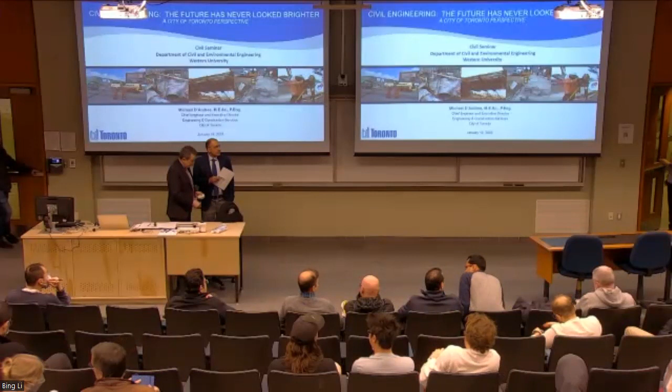Yeah, just easy, it's like...

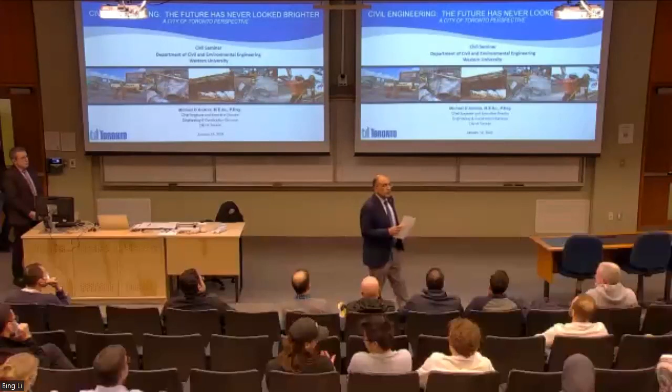Today we have a very special guest. It's a distinguished lecture, and that's why we open it for both our undergraduate and graduate students. As you can see, the title is very inspiring. I really like it. So the title you can see on the screen: Civil Engineering, the future has never looked brighter. City of London, City of Toronto perspective.

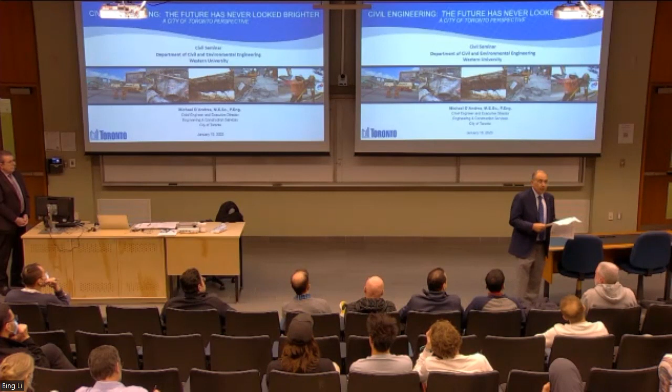It's my pleasure to introduce Michael D'Andrea. Michael is the Chief Engineer and Executive Director of Engineering and Construction Services for the City of Toronto. So he has big responsibilities, not only dealing with engineering, but also the policy and political side of managing engineering projects in the City of Toronto. You all know Toronto, it's the largest city in Canada for sure. Michael, in his current role, leads about 650 professional and technical staff, responsible for the engineering design and construction of Toronto's water, wastewater, stormwater, transportation, and solid waste infrastructure, valued at about $1 billion annually. So, a very large portfolio, and he is leading some of the largest and most complex projects.

Michael is a friend of Western and the department. He kindly serves on the advisory group of the department, giving us excellent feedback about various matters. He is a graduate of Western, did his undergrad and master's degree from Western in civil engineering. He was recently recognized by a very prestigious award for his lifetime achievements, the 2021 Ontario Professional Engineers Award, Engineering Medal for Management. We have something in common between myself and Michael: we both have a very good friend, Professor Badur, who was Michael's supervisor, and one of my great mentors when I started my career. So, Michael, thank you very much for joining us today, and we are looking forward to hearing your presentation, which will be very interesting.

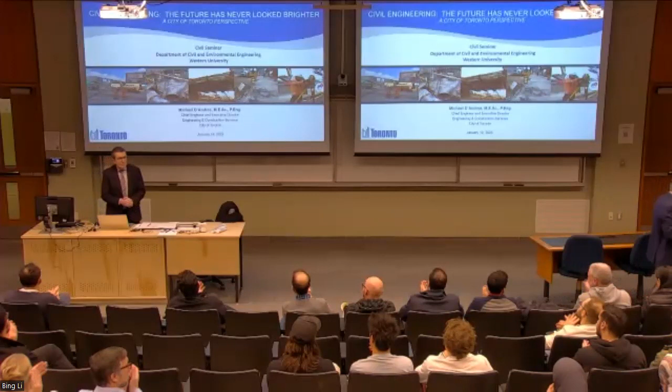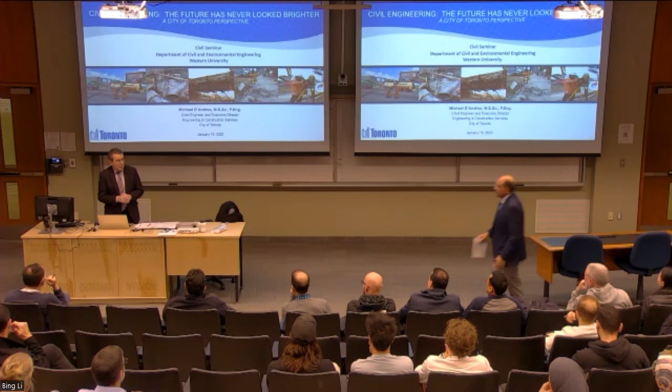Thank you very much for those kind remarks. Can you hear me at the back? I prefer not to use the microphone, a little more natural for me, so thank you. And thank you kindly, Dr. El Damatty, for the invitation. It is a bit of a homecoming for me, having spent a good number of years here at Western, and I'm always delighted to come back.

The title speaks volumes, and it is reality, it's not make-believe. My hope is that as I go through my presentation, I'll give you glimpses into the world of civil engineering in a municipal context. You'll see, certainly when I was in your shoes, sitting in those chairs, not exactly knowing what the world of civil engineering would hold for me when I graduated, that the world is your oyster. I'm envious of those of you graduating this year, but those of you in the program will see that the world of civil engineering, particularly in a municipal context, is like no other time in history, in my opinion.

So with that, I'm going to rush through the presentation. There's an awful lot of material that I think you'll be interested in.

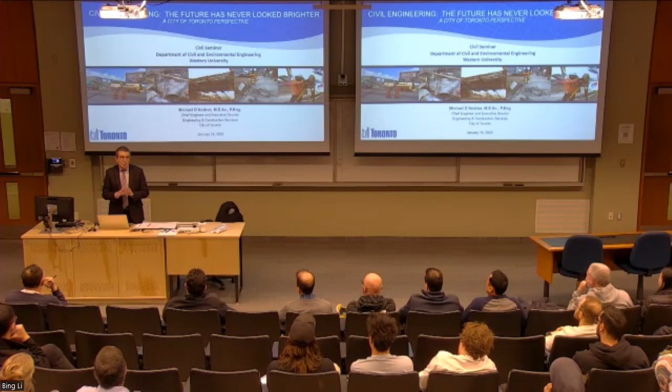How many of you are from the City of Toronto or the Toronto area? Just so I get a sense, because I go through some of these slides and I've got streets named. Okay, so not that many.

City of Toronto, as Dr. El Damatty said, is the biggest city in Canada, and very populous, with very dense urban development, particularly in the downtown core.

It's important to look at the context of what we're managing in terms of infrastructure. Often forgotten is the water infrastructure. It's underground, or we've got sewage and water plants that are out of sight, out of mind, but hugely important in servicing the life in a municipality.

Then we've got the transportation infrastructure. You see that and its state visually, but it's also a huge source of concern for us in making sure it's maintained to be safe and operable at all times.

I want to highlight, without getting into a lot of detail, that there are 900 bridges. I know a few of you specialize in structures - it's a huge body of work for us. We're obligated by provincial regulation to inspect these bridges on a 2-year cycle, and what we identify from that is embedded in a capital program, because from a due diligence standpoint we need to make sure those bridges, our most critical infrastructure from a civil standpoint, are properly maintained.

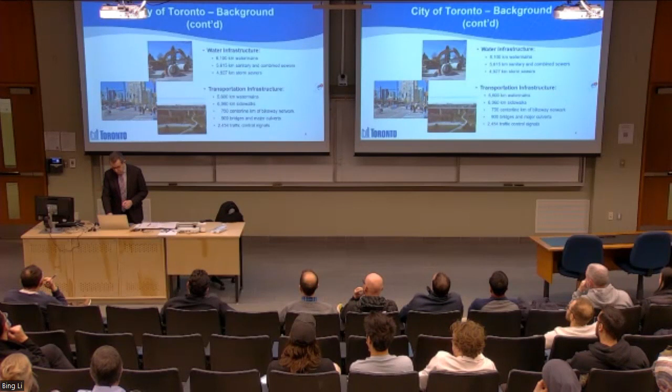I want to give you a bit of context on the City of Toronto, just to set the stage for the rest of the presentation.

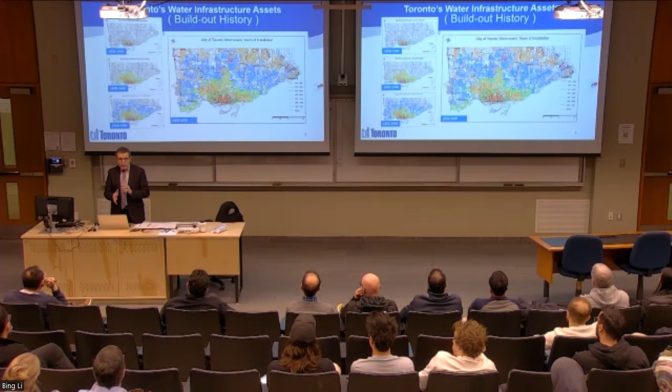What I've done here is shown the build-out of infrastructure. It's shown as water, but it could be anything - roads, sewers - just to give you a sense of the growth of the city. Take-home message: the downtown core has the oldest infrastructure, and it happens to be an area of particular focus for a number of different reasons.

This downtown area, shaded in pink, is where we've got combined sewers - a single sewer servicing both sewage and stormwater runoff. This is a huge problem from an environmental standpoint in terms of water quality impacts to our rivers and the waterfront, particularly when it rains, and a huge body of work that we're dealing with.

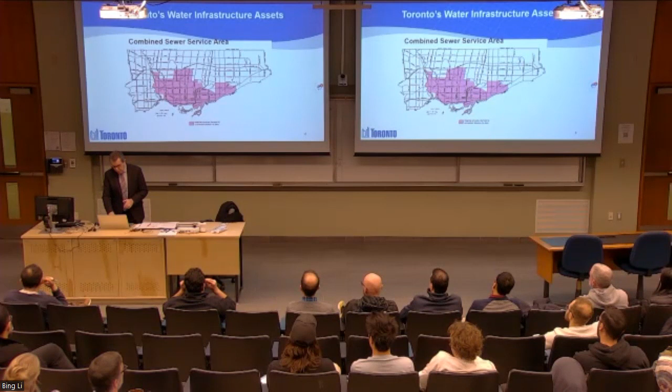This segues into this: Toronto has been identified as one of 43 polluted areas of concern in the Great Lakes Basin. There's been a huge level of effort - we've got a multi-year plan to deal with pollution problems largely associated with our sewer discharges. That's been another passion of mine, and pretty much my entire career, one way or another, has been spent dealing with some aspect of that.

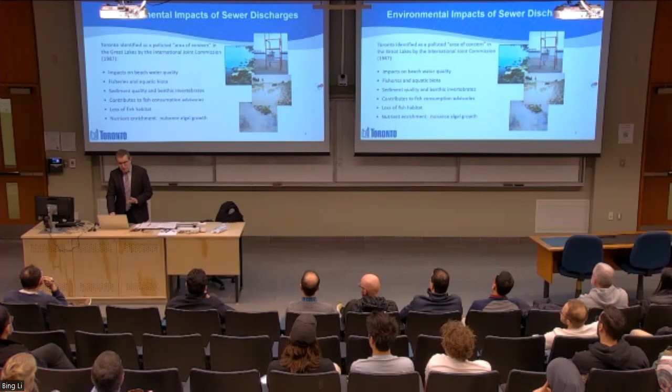Then we need to deal with extreme storms. Climate change is here and it's real. What we're seeing is far more frequent, intense storms that result in urban flooding, both surface ponding and sewer backups and basement flooding, but also huge impacts on infrastructure - we've had washouts of bridges, as shown in that picture, and situations where we have turbidity plumes from rivers that flow to Lake Ontario.

Lake Ontario happens to be a source of drinking water for the City of Toronto, and these issues cause concern in terms of being able to operate our water treatment facilities under these extreme storm conditions. Okay, so here we go - civil engineering rules.

Toronto's population will grow by 700,000 in less than 30 years. It's a huge challenge for us because that old downtown infrastructure wasn't designed to support the kind of growth we're seeing, and you'll see a couple more slides showing how significant that is. It's incumbent upon us to think ahead and plan for the future, working with our colleagues in planning to map out where they're forecasting future growth so we've got the necessary infrastructure to support it.

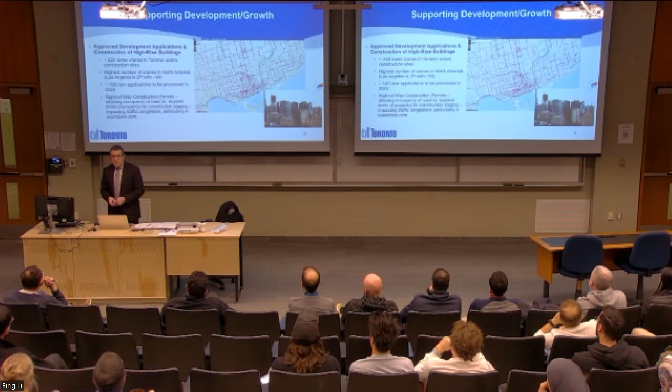So development growth - this is reality now. Each one of those specks on the map, I apologize for the resolution, represents a development either queued up waiting for approval, with approvals often going through my shop, where engineers look at the ability to actually service that development, particularly high-rise condominiums, making sure we've got the infrastructure to service it. In many cases those dots represent active construction sites.

These are staggering numbers for a guy who's been in the industry his entire career. We have 230 tower cranes in place in the city of Toronto, not just downtown but across the city. My colleague in transportation, who issues permits for lane occupancy for construction staging, sees about 100 applications queued up to the end of the year. We are the highest number of tower cranes in all of North America currently - the second highest is Los Angeles with only 50. So you can get a sense of the kind of growth Toronto is seeing today and forecast for the coming years.

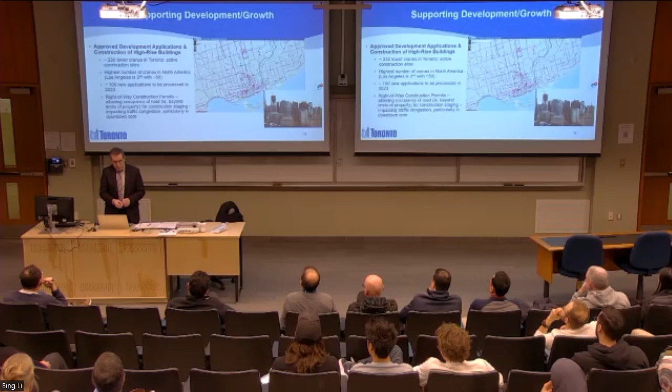On the geotech side, what I haven't shown here is that we were working collaboratively with the Oak Ridges Moraine Group, which is the conservation authority. Their geotechnical staff mapped out a three-dimensional profile of the surficial geology and groundwater regime across the city of Toronto, extending right up to the Oak Ridges Moraine. It was critically important to have a first cut on what the groundwater regime is in a particular location.

If you can imagine deep foundations, several floors of parking below grade - if your foundation ties into an aquifer, there are huge pressures with respect to relieving that hydrostatic pressure on the building. Normally we would have allowed direct discharge to our sewer system, but we can't now - we just don't have the capacity. This forces geostructural engineers to design the shoring system, sometimes with cutoff walls, essentially creating a bathtub in which the building is situated. It's a huge body of work. We've led the development of a strategy to deal with this, looking at new technologies in both design and construction - a huge body of work that's pretty recent.

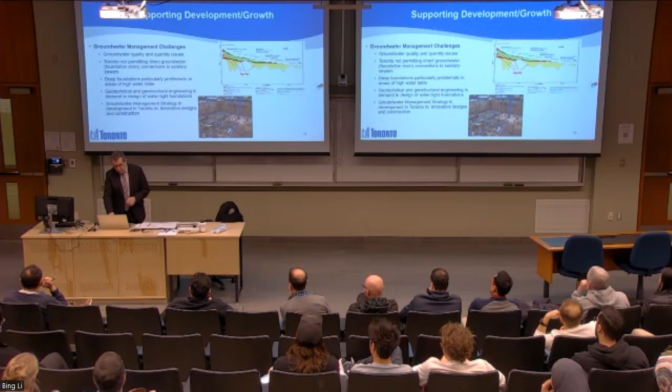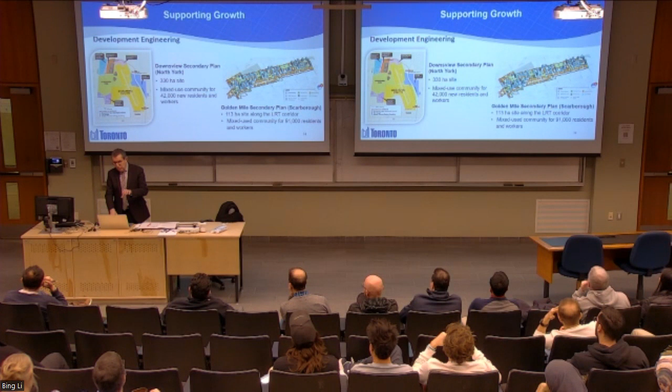These are a couple of large tracts of land in Toronto that are being developed. As I said, Toronto is completely built up, so what's happening now is intensification within these city boundaries. Those are two applications - one is north central and the other is in eastern Toronto.

So a take-home message: we've got a series of tunnels as well as local sewers and storage tanks to provide for that additional growth, and then reduce the overflows into the Humber River, which is one of the major watercourses in the city of Toronto.

So again, these are staggering numbers, even for me. The total project cost to be constructed between 2025 and 2032 is in the order of about $700 million. It's a major project. We're currently in the design phase. We went through an environmental assessment process to evaluate options, and we're currently into detailed design for that solution.

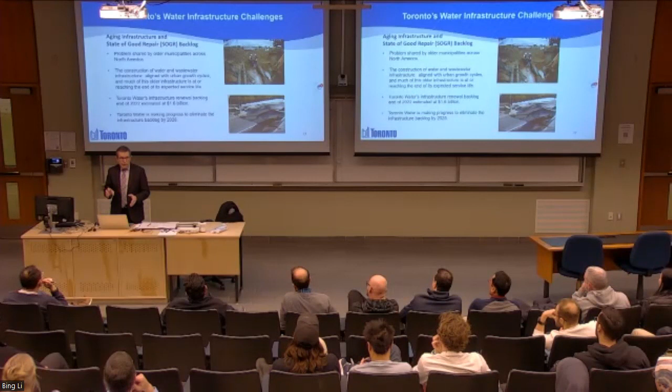And so the staggering numbers in terms of what the backlog is as it stands today. Some of these numbers are fresh off the press. I mentioned Dr. El Damadi. We are in the middle of a budget review process for 2023, which council is now hotly debating, and a lot of these numbers are extracted from that. Again, this is real life in the city of Toronto context.

This gives you a sense, thinking back in time, of how we built up the city, going back to those earlier slides. This water main data is representative of the situation we deal with across all of the infrastructure. We have 9% of those water mains that are 80 to 100 years old, well beyond their theoretical level of service life, and 15% over 100 years old.

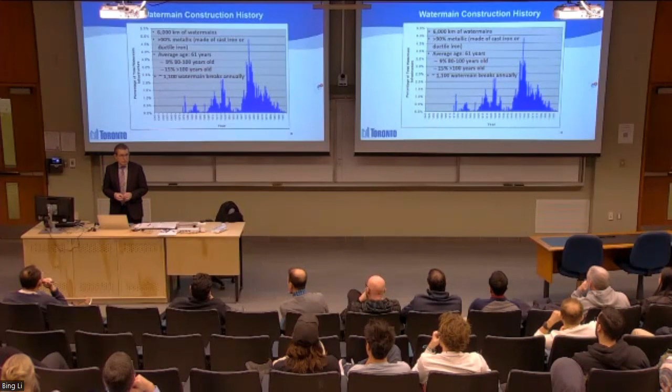We have water mains that were built post-WW2 in the northern, suburban areas of the city, that were spun cast water mains in very corrosive clay soils. They need to come out of the ground. It's been one of the challenges getting to those water mains before they fail and cause major disruption. So there's a huge program to deal with water main replacement.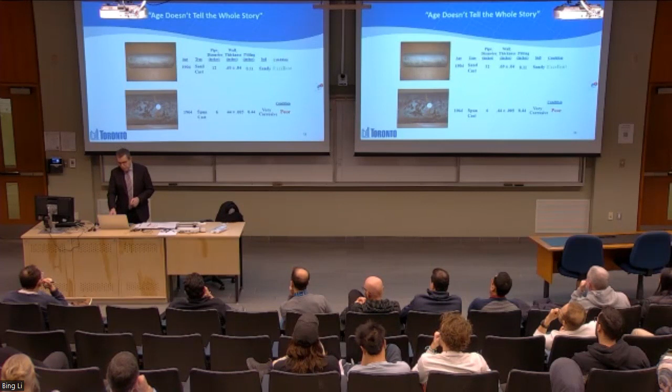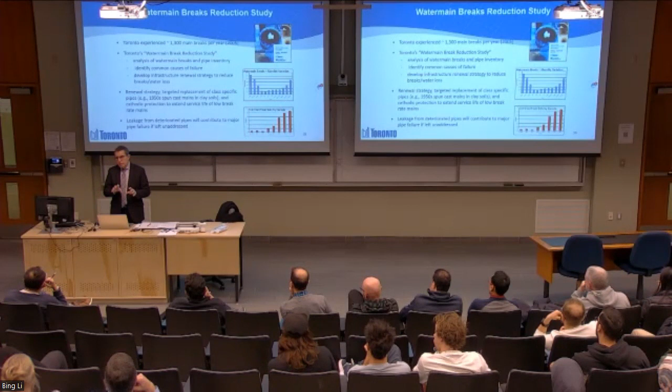So this is some of the analysis that we had done. Back in the day, we had something in the order of 1,300 to 1,500 water main breaks a year. The slide with the blue bars shows the seasonality of the water main breaks. We get most of them in the wintertime when you have frost penetration, causing movement to the water mains, making them fragile, so they break. We're on the road to replacing and renewing that infrastructure in a targeted way. We're not replacing every water main just because it's old; we're targeting those at or close to the end of their service life as a priority.

This is something else that we did. We created mortality curves for each class of infrastructure, to try to anticipate when we might have to deal with the renewal of infrastructure in advance of actually running it to failure. Then you come up with a capital program that addresses the needs you've identified, identifying discrete elements of infrastructure that fit the criteria established, so you've got a way of addressing the need based on the limited funding available.

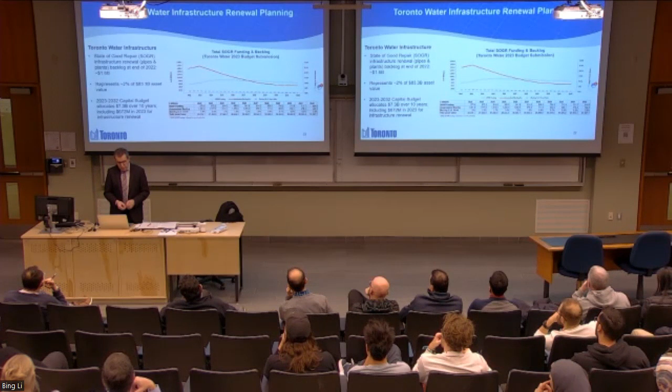So this is the good news in the Toronto Water context. The red line shows the infrastructure backlog in 2022, and it's slowly coming down, to the point that by 2032 they'll have pretty much chipped away at their entire infrastructure backlog. This is sewers, water mains, sewage plants, and water plants, all in. $7.3 billion of their capital program over the next 10 years, staggering numbers, is devoted to dealing with renewal of infrastructure, and almost $700 million is allocated for 2023. So that was just water, a big basket of assets.

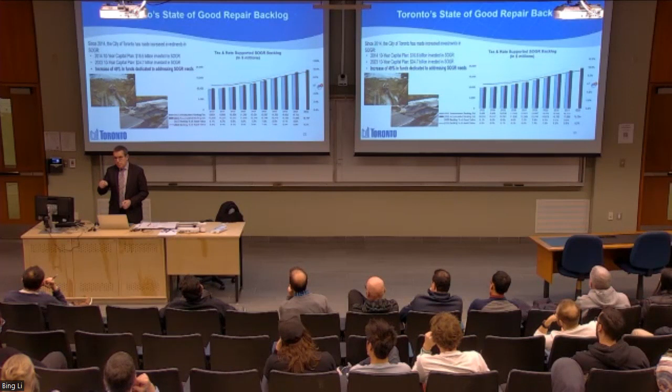This is now the city as a whole: water, transportation, building infrastructure. Again, staggering numbers, but this is hot off the press in terms of the 2023 budget submission. There's been an increase of 48% in funding directed towards state of good repair needs, i.e. infrastructure renewal. Again, these are numbers you couldn't have imagined, certainly at the start of my career, where there's been this concerted effort to invest in infrastructure in a manner you couldn't have imagined.

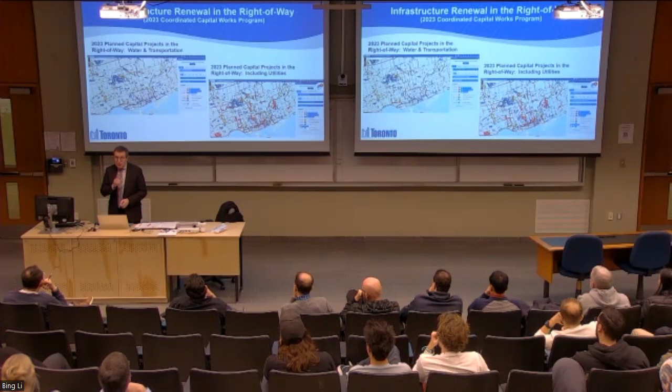Okay, so some real life big infrastructure projects. The Gardiner Expressway is a flashpoint. Dr. El-Damati will be front and center in front of council defending the need to invest significant dollars in the renewal of that expressway. $2.3 billion is our estimate in terms of what the rehabilitation needs. The elevated section, which is the source of much concern, debate and interest, is about 60 years old and at the end of its service life. It needs to be replaced. Our challenge is to actually get to replacing it in advance of it running to failure.

We run inspections - for the structural engineers in the crowd, we run inspections for the elevated section twice a year to make sure we've got things in order, and if we see the cover concrete is about to fall off, to get to it before it actually does, because it's a public safety issue.

So I'm going to show you the middle there, contract 1, Jarvis Street to Cherry Street. An innovative approach is what we used, successfully completed using accelerated bridge construction, which we're quite proud of. Our hope is that we use that approach for the remaining 4.5 kilometers of the elevated expressway.

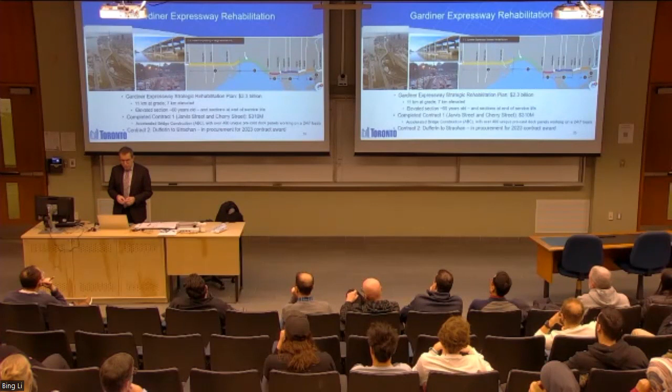So accelerated bridge construction, in a nutshell, to summarize: what we did for 1.1 kilometers was actually saw cut out sections of the elevated expressway - girder as well as the concrete deck - and the materials, both concrete and steel, were recycled. Separate and apart from that, we were prefabricating panels, some in the order of about 300 tons, 42 meters in length, 5 meters in width, and they were fabricated at a city-owned facility.

The contractor basically established a prefabrication shop on our land. The neat thing there was that we were able to quality control the production of these panels. There are about 410 discrete panels, each one different and precisely measured in respect to replacing what we had removed. So you'll see a picture on the bottom right.

That doesn't, it's not as basic as it appears, because each panel had a discrete number. It's kind of like a jigsaw puzzle. As a panel was removed, they had to organize themselves, stage the work in such a way that a panel that was removed could be replaced efficiently, as opposed to having to go into the yard and move panels around. So all of that pre-planning took a significant amount of effort.

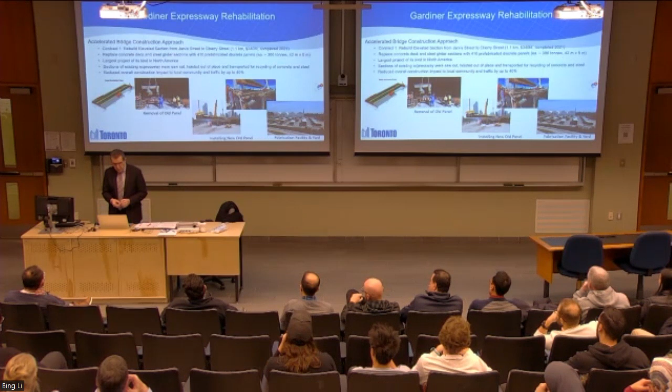The pictures in the middle show the hoisting operation, both in terms of the removal as well as the installation.

Now the neat thing here is that we pushed the envelope on this. We hadn't done anything like this before in the city of Toronto. In fact, in North America, to our knowledge, no one had done anything of this scale in an urban center. There's lots of accelerated bridge construction in terms of new construction in open fields, but not when you're in the downtown core of the city.

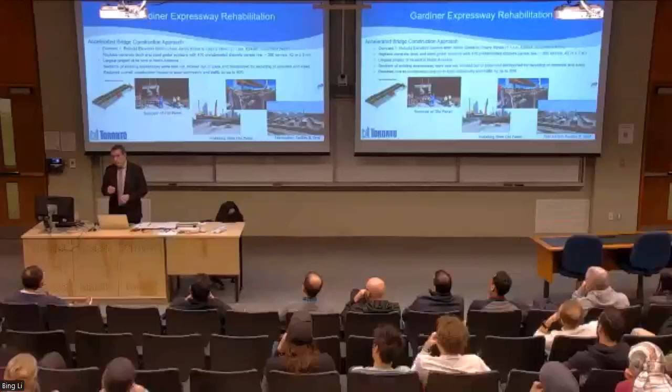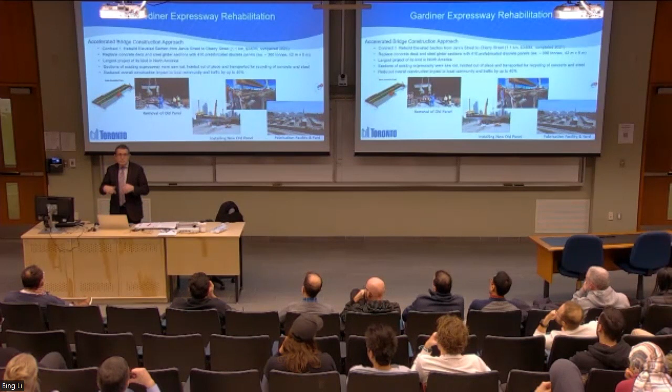For us, the advantage was, if you take up a lane of traffic on the Gardiner, there's a huge impact to the road users. But also, for this kind of construction, because it is noisy and dusty, there's a huge impact to the local residents. So what it did, we were able to shrink the construction schedule by about 40%, and ultimately reduce the overall impact to the local community.

Okay, transform the municipal right of way. So these are some major projects that are underway. Again, it's the rebuild of the city, but in a very progressive way.

6 Points Interchange is in the west end of the city, in the former city of Etobicoke. The picture on the left shows it basically looked like a highway interchange, a series of bridges and on and off ramps. It really didn't speak to intensifying, because it was really just having residential development right next to a highway. So the planners, working with the local community, came up with a completely wholesale revamp of the design, shown in the picture on the right, which is the finished road layout. I'll get into that in a little more detail.

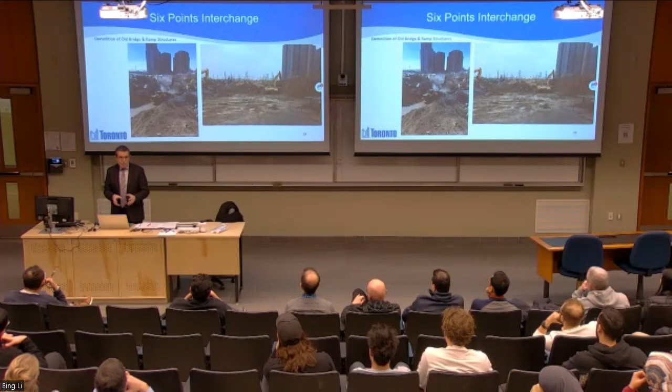Here's a picture of what went on during the demolition of those bridges and ramps. There was much media interest around that because nobody had seen anything of that scale. Basically, one entire section of the city was literally under construction at the same time, which meant major traffic impacts that we were dealing with.

So here's what the layout looks like, shown in schematic form. There's a cross-sectional view on the left, an artist rendering on the top right, and a bit of a cross-section on the bottom right. A couple of things I wanted to highlight.

It's a complete streets approach. This is in vogue now across the whole city, but internationally as well. You're looking at the municipal right-of-way, basically the road allowance, and you're maximizing its use for multimodal transportation—vehicles, cyclists, pedestrians.

At the same time, from a water quality standpoint, you have to drain all of the stormwater that falls on that streetscape. So what we've done very innovatively, shown schematically at the bottom, is a series of kind of like egg cartons. There's a number of vendors, but basically you're intercepting that stormwater and allowing it to infiltrate into the ground. What doesn't infiltrate, you end up picking up through perforated storm sewer pipes, and then they get discharged. You're trying to minimize the overall environmental impact of that road network to the extent that you can.

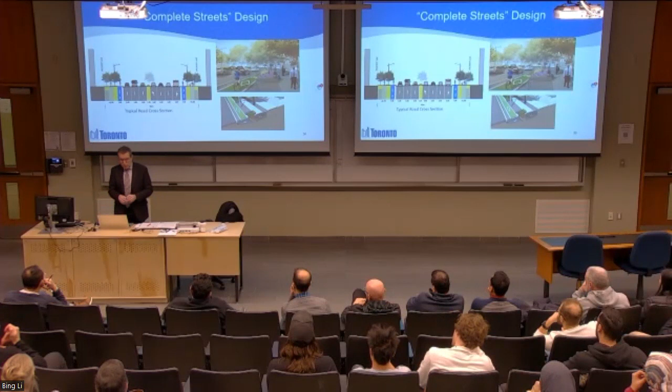And this is what it looks like. On the left, it's a picture post-construction. And on the right is that series of soil cells—those industrial size egg cartons that basically take the stormwater and infiltrate it.

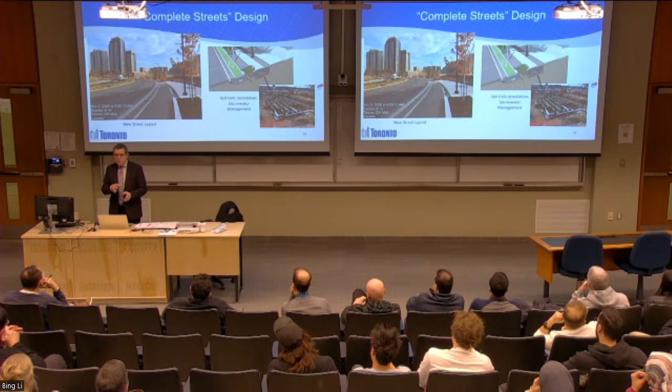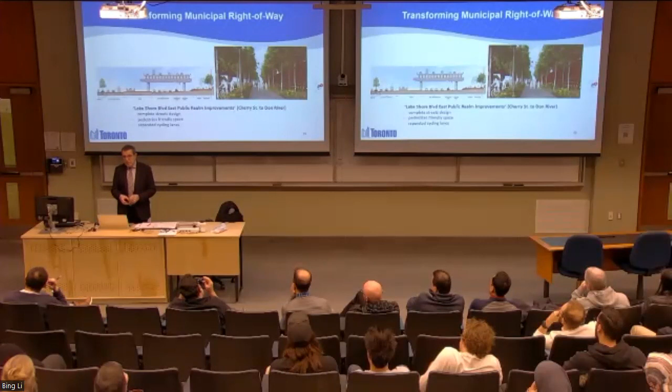Improving water quality - going back to my introductory slides, this is a huge body of work in Toronto. It's a real priority; we want to see ourselves delisted as a polluted area of concern in the Great Lakes Basin. There's been an awful lot of work. I'll start with this outfall project. Sad to say, but I started my engineering career on the pre-design for this outfall, and now, towards the end of my career at the City of Toronto, we're finally building it.

Long story short, there's a new outfall that extends 3.5 kilometers into the lake bed in rock into Lake Ontario, with a series of 50 diffusers over the last kilometer, sitting at the lake bed. All of the modeling for the design of this project was done with the approval of the Ministry of Environment and Climate Change, because we want to maximize the initial dilution so that outside of the mixing zone, we meet water quality objectives for a series of parameters. There was an awful lot of work on a proper design, with a limited amount of head available to drive the flows through that outfall.

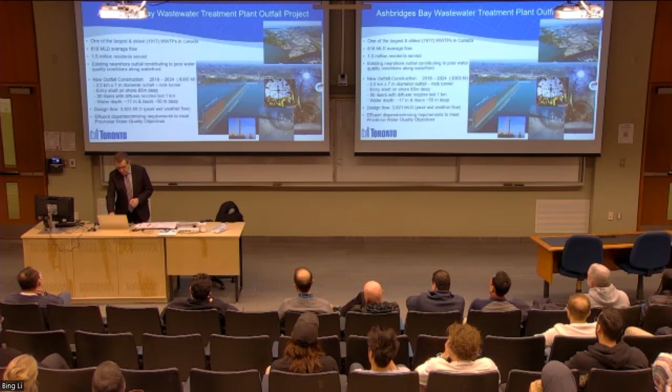Similarly, another project is now looking at the cleanup of the Don River. The Don River is one of the major water courses in Toronto, with the dubious distinction of being one of the most polluted rivers in all of Canada. It's been a real problem for us from a water quality standpoint. It flows into what's called the Inner Harbor - if anybody's been to Center Island, the water body between Center Island and the mainland is called the Inner Harbor. The Inner Harbor also sees the discharge of some of the biggest combined sewer overflows in the city, a huge problem from a water quality standpoint. Ultimately, to delist us as an area of concern, we needed to clean up the Don River and the Inner Harbor.

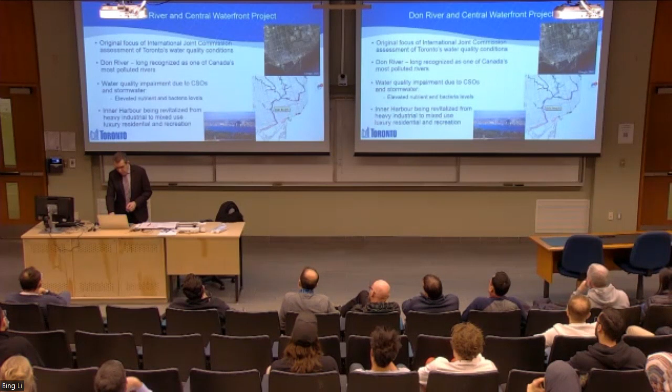Many, many years in engineering planning, many, many years on the engineering design. We came up with a series of deep tunnels, most of them in rock, but one in soft ground. The main stem, the Coxwell bypass tunnel, we just completed construction of. It runs 10.5 kilometers up the Don River Valley, down to depths of about 50 meters. What needs to happen now is the connection of the sewers that will flow into this tunnel so that they don't flow into the river.

We do provide for some overflows in the event that the tunnel is at capacity, but the design was premised on taking our historical rainfall records and doing computer simulation modeling to assess how big the storage needed to be to support our end objectives. The pink tunnel comes down and connects up at our Ashbridges Bay Treatment Plant, which is where that outfall project is. The next leg is the Inner Harbour West Tunnel, currently in detailed design. Ultimately, when it's all said and done, we're cleaning up the lower Don River and the Inner Harbor - the most significant project of its kind nationally from a water quality standpoint.

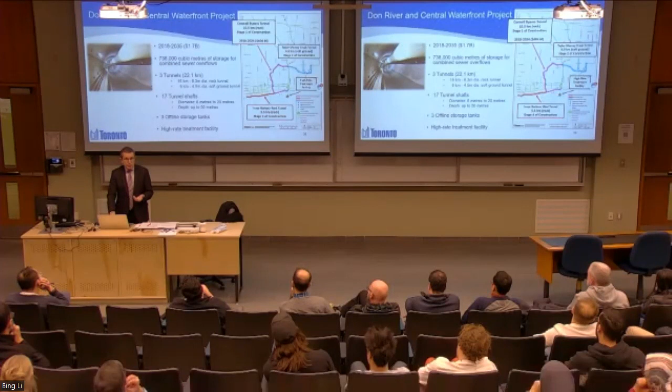Integrated pumping station. Now that we've got this deep tunnel, you have to pump the flow out of it and provide treatment. The idea is we're going to have a dedicated high rate wet weather flow treatment facility on the site of the Ashbridges Bay Treatment Plant, which deals with human waste. The effluent from that high rate treatment goes to the plant to be disinfected, then flows out through that outfall I just showed.

It's all integrated. Separate and apart from that, we've got two aging sewage pumping stations that service the Ashbridges Bay Treatment Plant. They're pretty much at the end of their service life and needed to be replaced. So from a maximizing approach, we decided to build one large pumping station that meets the wet weather flow needs as well as the sewage needs, all into one integrated massive pumping station.

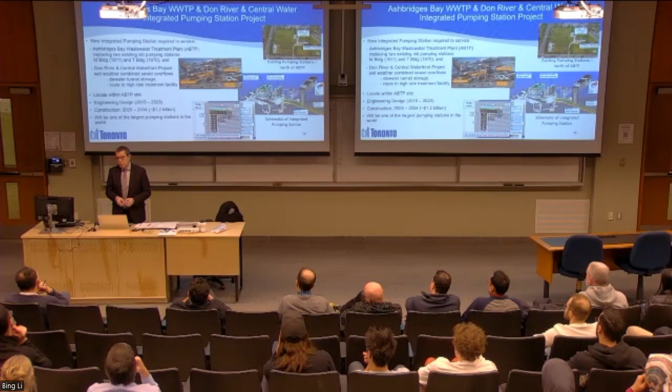We're just in the throes now of finalizing detailed design. We hope to get out to procurement later this year. The numbers are staggering—it's a single facility estimated currently at $1.2 billion, and probably one of the largest pumping stations in the entire world. But from the standpoint of the city, it's of huge value to us, both in terms of sewage and supporting the sewage plant as well as wet weather flow treatment.

Earl Bales Park, the Earl Bales Stormwater Management Facility—this is a number of stormwater ponds. This is iconic for me for a couple of reasons. One, it was at the time the largest stormwater management facility in the province of Ontario, and this is nestled right in the heart of the city of Toronto.

But we have plans for 170 facilities across the city. This is designed largely for water quality improvements because the flows from this drainage area flow right into the Don River. The bottom is sort of a representation of where it lies relative to the topography.

The neat thing about it, above and beyond being a water quality facility, is that we're drawing water out of the pond in the summertime to augment irrigation needs for a city-run golf course. In the wintertime, we only have one ski hill left, and apparently stormwater, because of its impurities, is a great source for snowmaking. So there's a local ski hill that draws water from this facility to support their operations.

Stream restoration—there's no way anyone would think, back in your shoes as a civil engineer, that we'd be involved in bioengineering of streams. And yet that is a huge body of work, not just in the city of Toronto, but in vogue now, arguably internationally. Back in the day we used to concrete line trapezoidal channels—no more. It's all bioengineered now. We're trying to address the channel hydraulics while at the same time creating fish habitat and maintaining overall ecosystem health for the area, supported by design guidelines.

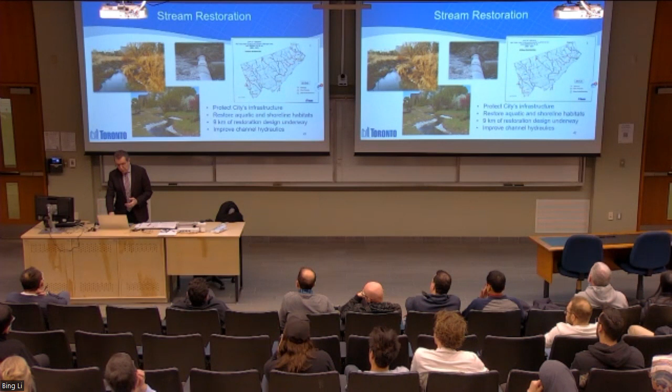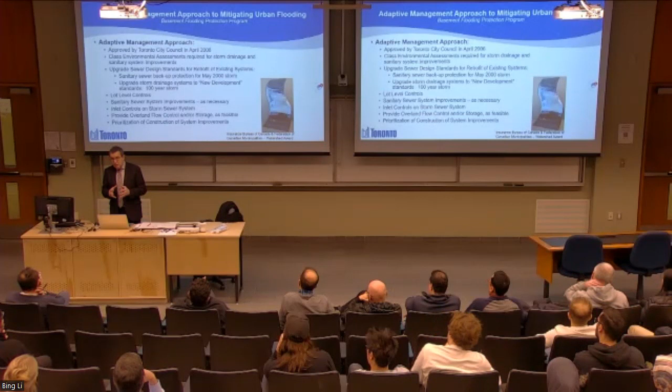Okay, I'm just going to rush through climate change, and I'll go back to the extreme storms and what they've done in a Toronto context. We have an overarching plan to deal with the impacts of these extreme storms, and it's a stormwater management challenge for us, admittedly within a completely built up area.

If you take a look at the topography of the city of Toronto, I often refer to it as a series of soup bowls. If you're at the bottom of a soup bowl, when that sewer system is overloaded during extreme storms, you're going to get flooded. You'll have surface flooding, and the water can make its way into the sanitary sewer system, surcharge it, and back up sewage into your basements. That's a given. If you're at the top of the soup bowl, you've never been flooded, not likely to be flooded, because you're on high enough ground.

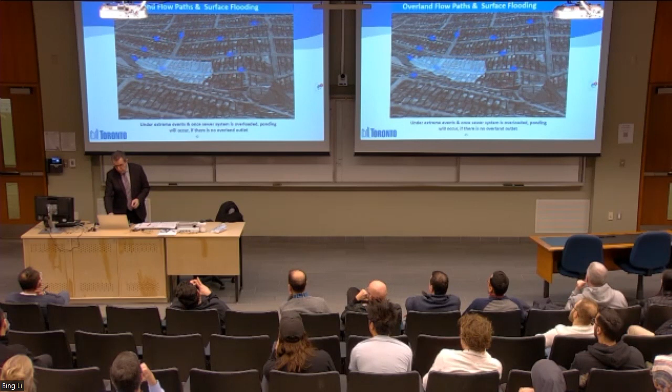The challenge for us is that if you're at the bottom of the soup bowl, you may have had a long history of having sewage in your basement. And you can imagine the hue and cry, both from the public and our political masters. So the charge to us was to fix this problem once and for all.

Each one of these study areas is a community, and represented here is the schedule of the work we've done. We've had to tailor-make a solution in each of those communities. This is what a typical construction site looks like in the community. I'm not going to get into a lot of detail, but a good portion of Toronto Water's capital program is dedicated to this basement flooding protection program.

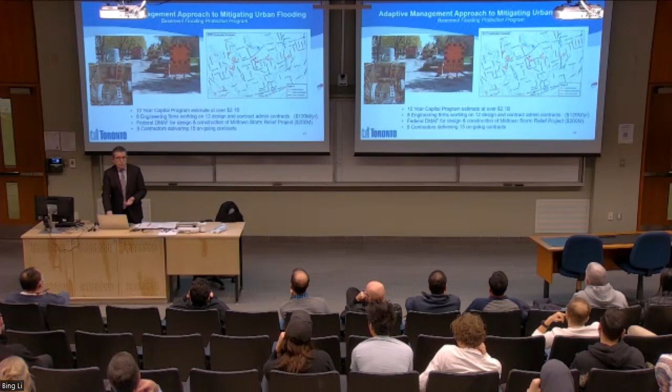So far as this year is concerned, they've got something in the order of $2 billion over the next 10 years in terms of sewer and stormwater management upgrades.

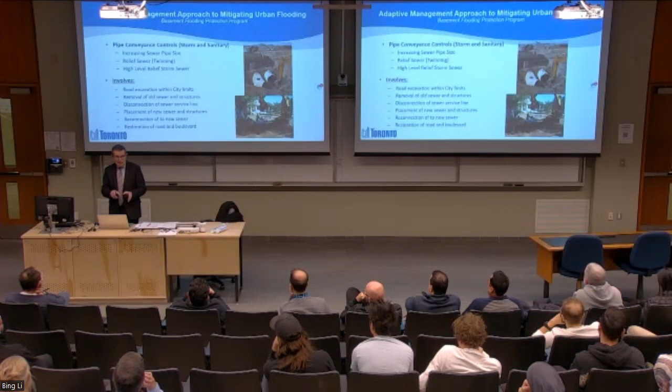I'm not going to go through the details, but suffice to say it's basically tailor-made. Sometimes it's upsizing sewers, sometimes it's installing storage tanks or stormwater ponds.

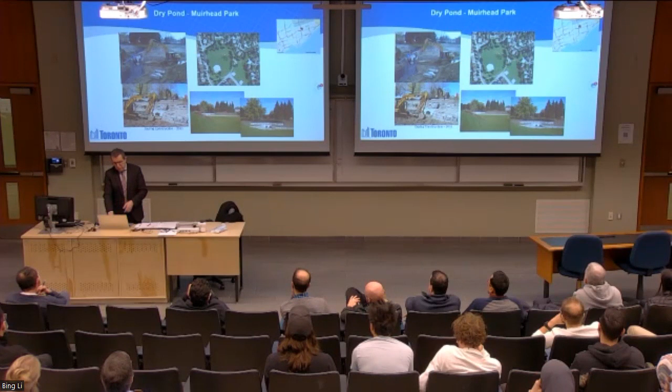Here are some visuals in terms of real life. That's a stormwater pond under construction on the left, and then post-construction. This is a stormwater tank. Our whole objective is, rather than having that water pond in low-lying areas, to intercept that stormwater and redirect it away from those urban centers.

That's the overall premise. Council charged us to provide a service level of a 1 in 100 year storm, which is unprecedented in a completely built-up urban area. Those storm systems were designed for a 1 in 2 to a 1 in 5 year return. So here we are, really at the limits of what's imposed for new or greenfield development.

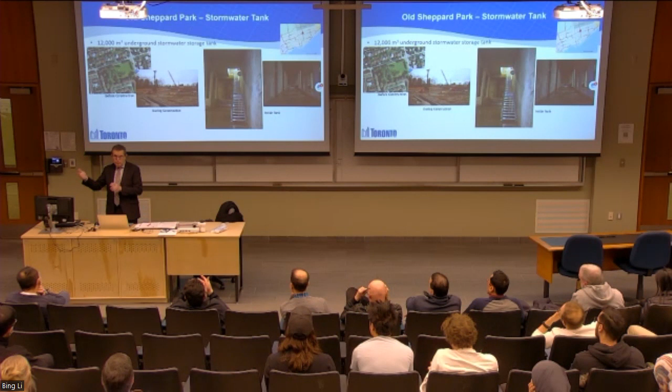Transit expansion — it's in the news in Toronto all the time. I'm not going to go into the details, but suffice to say it's a huge volume of work, covering all aspects of civil engineering.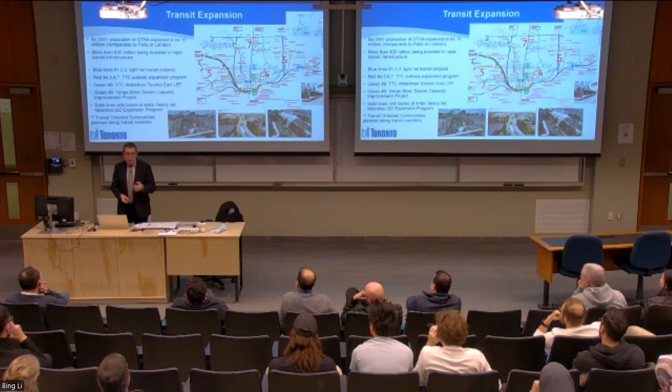The challenge in my shop is that we have to service that development. A number of these stations are quite significant, so we need to move some of the underground infrastructure, and that has to be done in accordance with our requirements. In addition, given the amount of growth expected in Toronto, planners would like that growth to be oriented around these transit upgrades, so you have transit-oriented communities to help subsidize or support the massive investment being made, both in light rail and heavy rail transit systems.

So that's the City of Toronto — that's just what's in play in the City of Toronto.

Now, when you take a step back and look at it more regionally, with the Province of Ontario and their Metrolinx system, each of those dotted lines represents an expansion to their existing network. Again, a huge body of work, when you consider all the bridges that need to be installed and the existing bridges that need to be replaced.

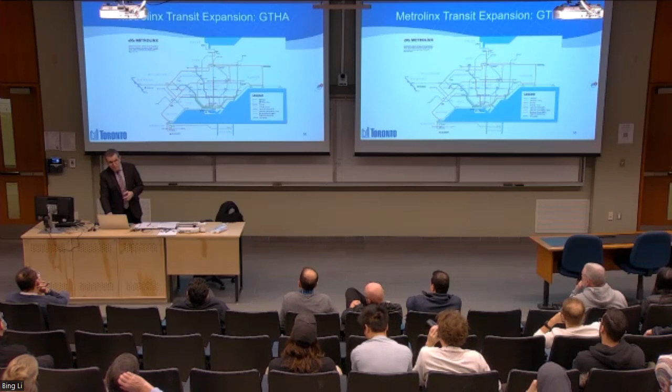Okay, intelligent engineering systems are almost done — something you probably wouldn't have thought about.

As engineers, there's a body of work underway to protect our source water. Going back to that earlier slide showing the plume, that plume could actually impact our water treatment plant intakes. So we're working collaboratively with our area municipalities on either side of the City of Toronto on a decision support system, a computer simulation model where we feed field data instrumentation from Lake Ontario, both currents and water quality, to run real-time simulations in the event of a spill.

A spill could be a massive sewage spill or a petroleum pipeline break. We've got a number of petroleum pipelines cutting across the city, and a major storm with undercutting is entirely possible. The example at the bottom is a snapshot in time from that simulation, which can inform whether we may need to shut down a water treatment plant intake. We've got 4 water treatment plants servicing the City of Toronto, and again, it's from a human health standpoint, so this is critically important.

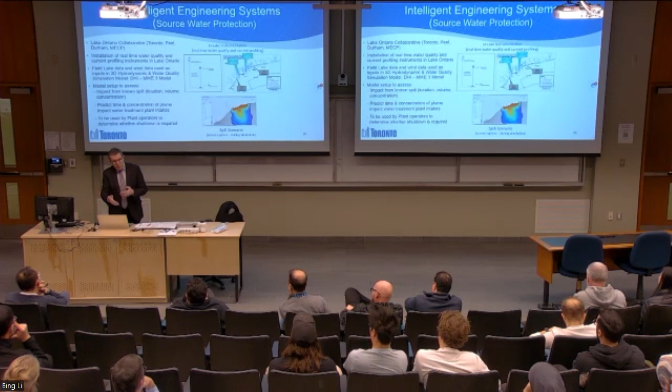This is still a bit of an evolution, but these are images hot off the press in terms of where we're at with that model development.

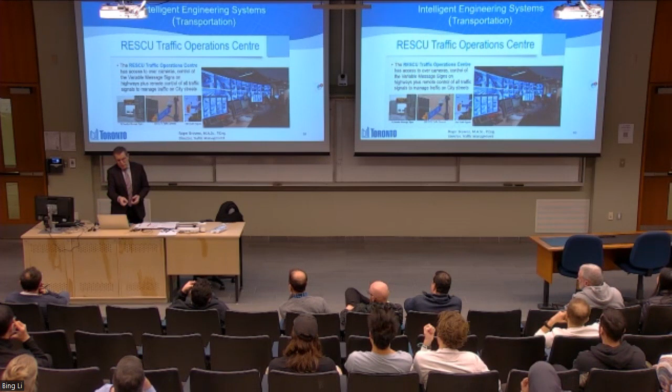On the traffic side, intelligent transportation systems - that's a control room in a remote area under high security. The Transportation Services Department has remote cameras tethered to this central station where they can monitor traffic movement, affect traffic signal timing, and adjust the variable message signs. They can also pick up cell phone signals across the city to gauge whether they're vehicles.

They gauge the level of traffic at a given intersection and make a real-time decision about whether they need to adjust the signal timing on that street or adjacent streets. All of that is closely monitored. Here's an example showing the monitors currently across the entire network, and all of that is controlled centrally.

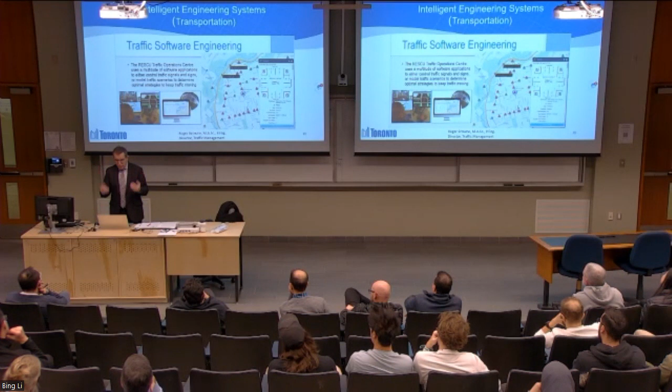Okay, capital program budget, so you know I'm not blowing smoke. This is Toronto's capital program budget for the next 10 years - $49 billion, the biggest ever capital program in the city. You can see right at the very top: water, transit, housing, and transportation. Those are all civil engineering focused activities.

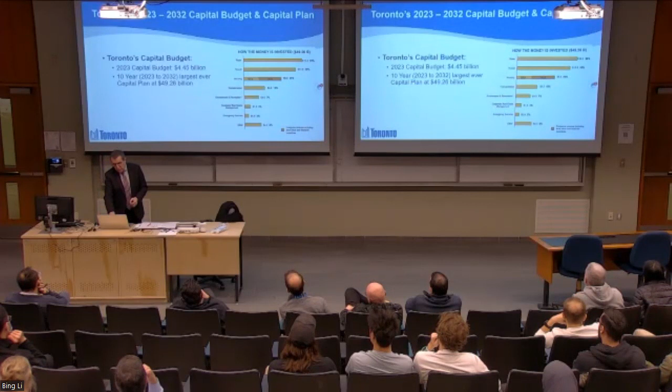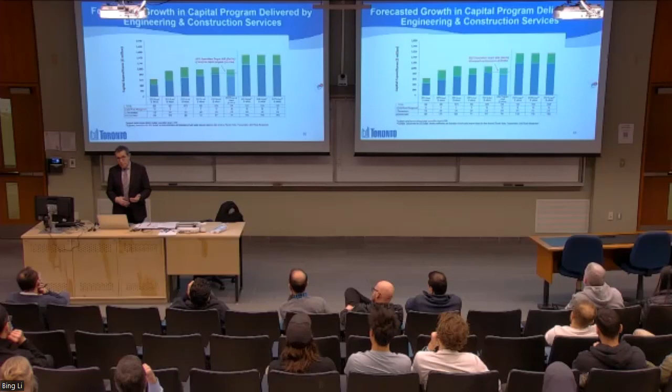This is my world, this is my division, where we've been delivering, as Dr. El-Damati said, about $1 billion in capital every single year. 2022 is where that line is currently, but you can see the forecast is a continued increase in the amount of engineering and construction expected from my shop over the next 3 years. Okay, a bit over time, but that's the presentation.

So we have room for maybe a couple of questions. Thanks for that really interesting talk. I wonder how you, in your role, manage the longer term vision of the issues you're dealing with. How do you deal with city council, and what strategies do you use as an engineer to navigate the politics of what might be shorter term views on council?

That's a daily challenge for us, admittedly. Partly it comes down to communications. I take great pride in our staff reports, that we take the engineering and the engineering lingo that's commonplace for us and translate it into layperson's language - I wouldn't say dumb it down, but that's been a real challenge. My entire tenure at the City of Toronto has been that they will challenge, and it's their right to challenge, but once they get an understanding of what is doable or not, they typically will side with you and say, 'aha, I hadn't thought about that.'

As I mentioned to Dr. Eldamadi, a focus in the next couple of weeks - if you're watching the news I'll probably be front and center - is the Gardiner Expressway. They made a decision years ago, and we're implementing it as good engineers, just following council direction. But there's a faction that will continue to want to debate and revisit it. We're at the point now where it's at the end of the service life - if we don't get on with what we need to do, we may literally have to shut down this expressway from a public safety standpoint.